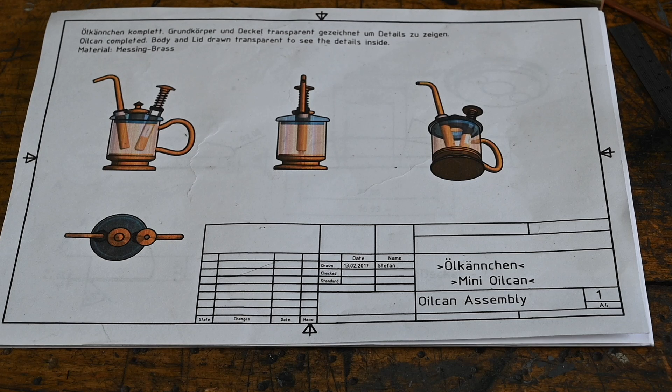Right, so I'm going to make this little mini oil can. I found these plans on the internet. I'm not going to do it exactly the same as that, but I got this bit of leftover brass from a steam engine project. I got another bit of brass rod. I got some copper pipe. I'm going to make a couple of springs, and that's about it.

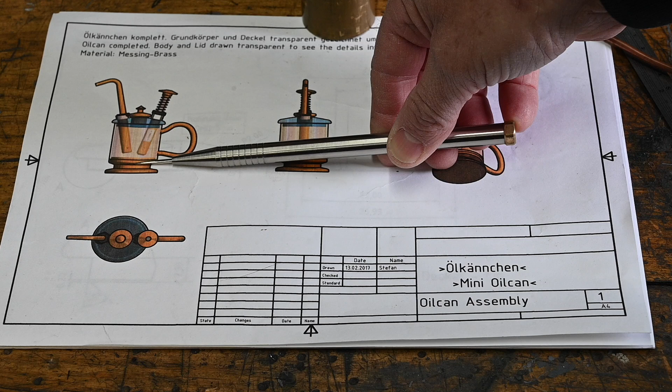It's fairly straightforward. The plans actually show this middle section. It's not transparent like this drawing. It's actually brass. They show this middle section made out of brass tube, and the bottom is separate and then silver soldered on, but I'm not going to do that. I'm going to do this all in one because I can't see the point in doing it in two if I've got a piece of brass big enough to do the whole lot. So anyway, let's get over to the lathe and get this turned down. Let's get that mounted in the chuck.

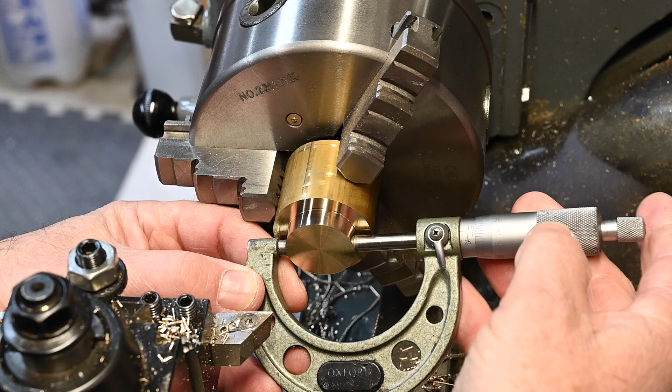Right, I've got to take my fixed tool post off and put the compound on. I've set the compound up. I'm just going to cut the angle on the front. Right, that's got the lead angle. Just going to put a little round on there.

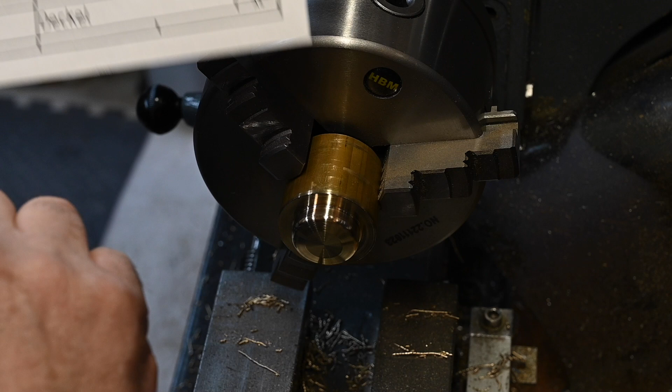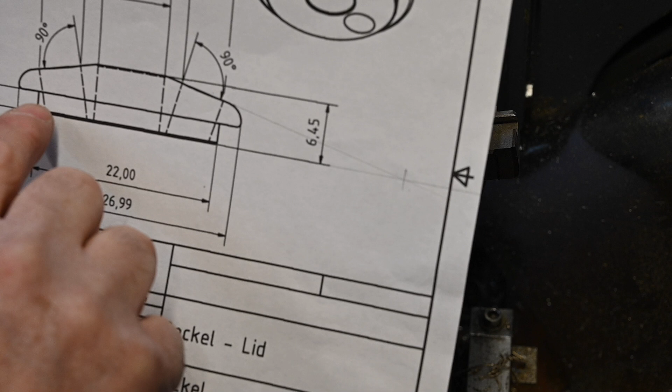Right, so I've got this little round here now, and this chamfer on there, down to the 8mm on the flat top. Well, I've actually gone 10mm because when I bore it out, I don't want that to be exactly to the edge of the chamfer. I want a little step there. That's just a change in design, nothing to worry about. Right, I'm now going to put a parting tool in and form this piece here, the little lip that then sits inside the top of the can.

Right, I'm just going to set the DRO. I'm touching off on the face with the parting tool. Set the DRO to 0. Come out. Move the cross slide 2.3mm, which is the thickness of the blade on the parting tool, and then re-zero the DRO. That now means that the edge of my parting tool is exactly right with the outside edge. So now overall I'm 10mm, or should be thereabouts, 8mm I think, yeah, 8mm. So now to cut that shoulder I've got to come back 4mm.

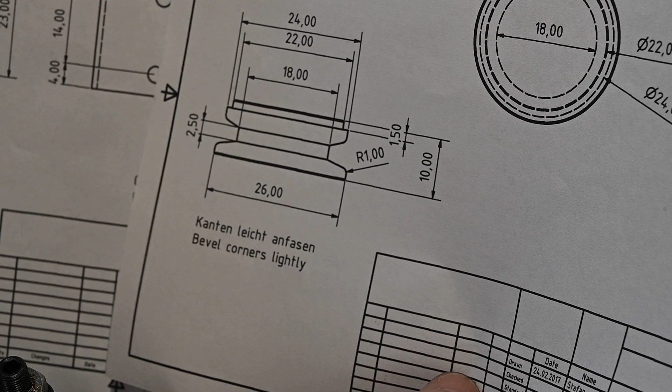Right, just got to drill a 5mm hole for the filler cap. I can now part that off. We've got so far. Right, now going to turn the base, which is this piece. It shows it separate, and then it shows just the little design on the bottom there. I'm going to do that all in one, so effectively that'll join onto that. So anyway, let's get it turned down to 24mm.

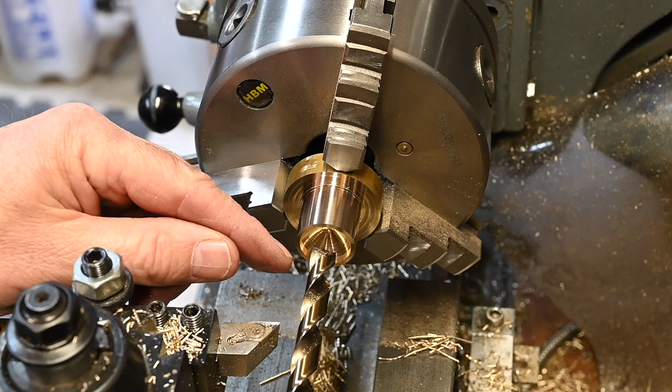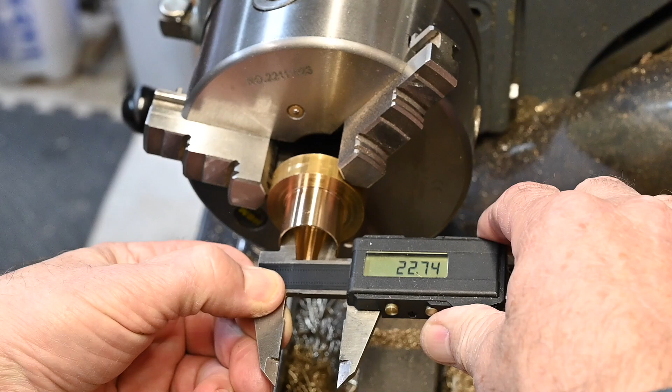Right, I'm going to drill out the centre to 20mm and then go in with a boring bar to finish it off. Now, because I've already got some drilled out there, I've got to just set the drill tip to the edge. So I'll just bring it down. One minute, bring it in a bit. Oops. Right, touch off on the scale, 0 my DRO. Perfect.

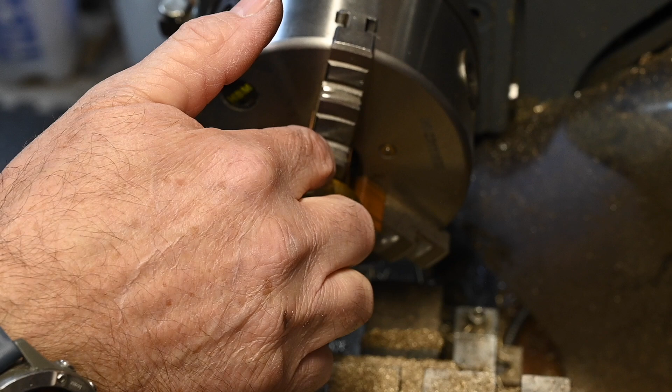Right, just got to flip it over now and turn the base down. Right, I've got it flipped round. I put some copper on the jaws, the soft jaws, and I haven't over tightened it, hopefully, because I don't want to distort the other side, but anyway, let's hope not.

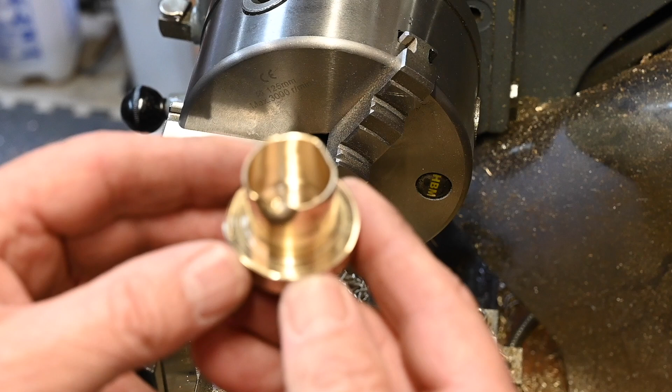Well, I got too greedy, and this is the result. So anyway, find another piece of scrap brass and start again. What I'm going to do this time is turn this end first, because that way I'll have something solid. Take the soft jaws out for a minute. Fortunately, I have got another offcut from the turret on the steam engine, so I'll be able to use this.

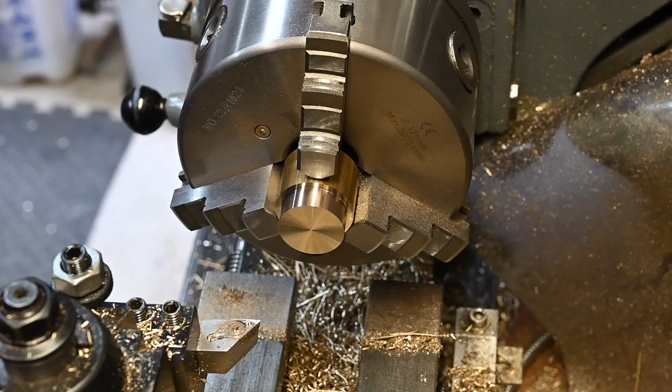So let's get this sorted out to start with. Let's get the tool square to the work. There we go. Right, I've now got the tool square to the work. I'm just going to eyeball that. Right, I've just eyeballed the centre of the tool. I'm now going to move it over 5mm and lock it off.

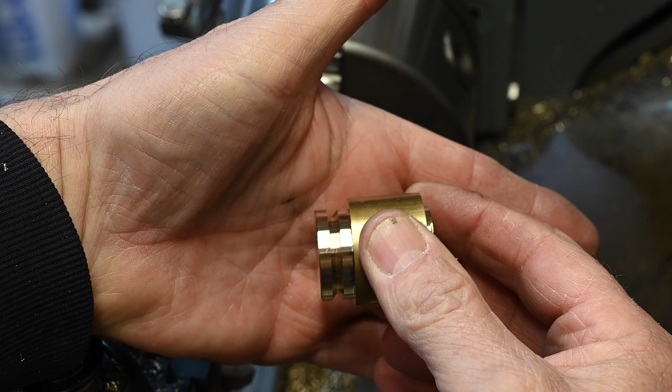Right, the drawing calls up for this shape, but I quite like the shape I've done. I'll take it out because I've finished that end now. I'll find the key. I quite like that shape. So I'm gonna leave it at that for the base. So now I'm gonna put it in the other way around, turn this down, hollow it out, same as I did the other one before I messed it up.

Right, that will go on. I don't want to force it, because I want it to be a tight fit. Right, good. I don't want to get that stuck on when that cools down. I mean, there's not a lot of heat in there, but I don't want to put the lid on and then it cools down and I can't get it off. So anyway, let's whip it out.

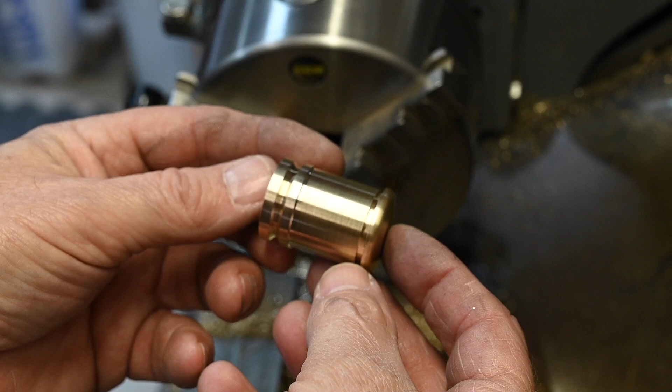Right, that's where we're at so far. Take two, of course. Yeah, starting to take shape. Right, the next part is to make the little finial, which I'm going to do now. So get a bit of brass set up and we can make a start on that.

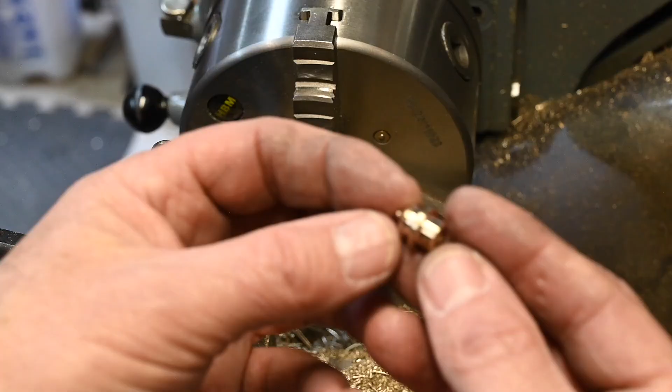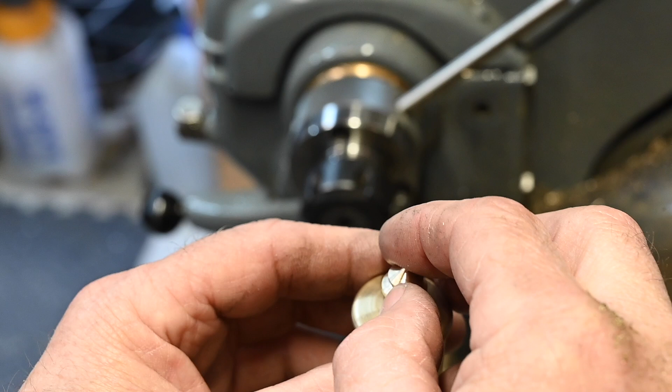Alright, I'm just going to put it in a collet just to tidy this point up. Little finial. That goes on the lid. Then you've just got to put an 8mm hole in there, and that's the little finial that you use to fill the oil can up with. Okay, so that little finial goes on there.

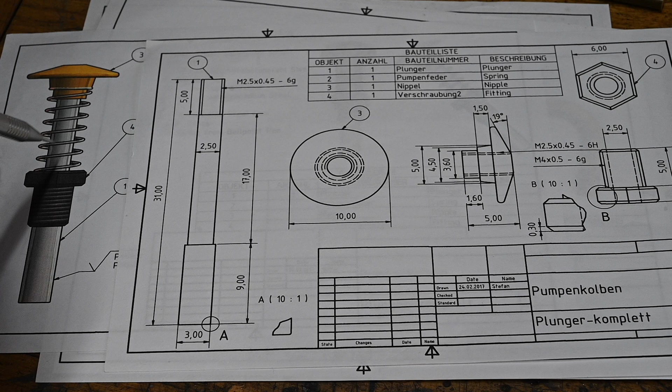Right, today we're going to make the plunger. Start off by making the top cap, and then we're going to make this retaining screw, and then we're going to turn down the shaft and make a spring for it. So let's get on with the little cap on the plunger first. It's only 10mm wide by 5mm deep.

I've got to do a 1.8mm hole in there and tap it for an 8BA. It's not going to be much of a thread because it only goes in 4mm. That's the hole drilled. Just got to get an 8BA tap now. I'm not sure what's happened there. 1.8 drill for an 8BA.

Alright, just had a bit of a cock up there. I got a bit worried there. I picked up the 6BA because I didn't read it properly, when it should be an 8BA. So anyway, we got the right tap now. I only want to put a little bit of pressure on this. Not going to get many threads in there. That's it, we're done.

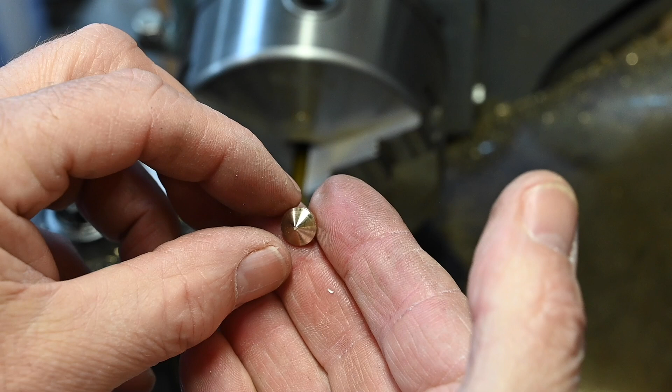Right, just need to get it parted off, but I got it parted off at an angle because it'll form the top of the cap, the top of the plunger. So I'm going to part it off with this little angle bit. Went off in completely the wrong direction. Right, that's the little cap for the plunger. Got a thread in there. Just got to clean that little pip off the top.

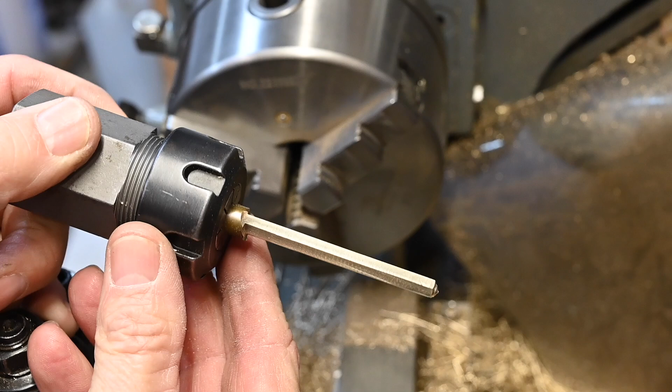Right, I just had to make a bit of 6mm hex stock. I didn't have any. The nearest I had was 8mm, and that was going to be far too big for this, so I just made a bit of 6mm. That's just for the fittings. Right, that's got to have an M4 thread, 5mm down, which is the size of the fitting. So I need to turn that down to 4mm.

Get an M4 tap on there now. Sorry, an M4 die to put a thread on. Alright, let's get that on there. I'm going to do a 2.4mm hole and then ream it to 2.5.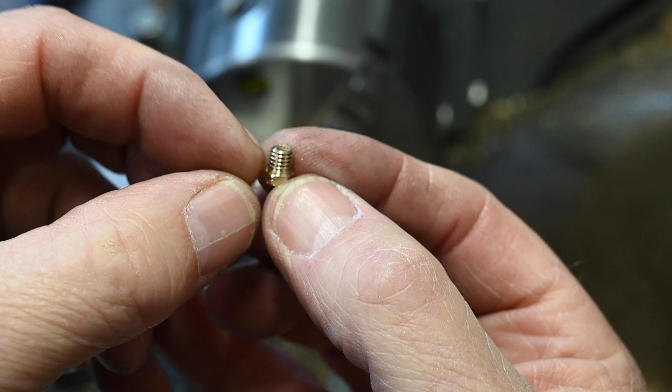Right, there it is. One fitting, which is, see, when you look at the drawings, it's not so bad, these fittings. You think, oh yeah, that's okay, no problem. And then when you make the fitting, it's a bit more of a big deal then. Anyway, we got that one done. We got another two of these to make.

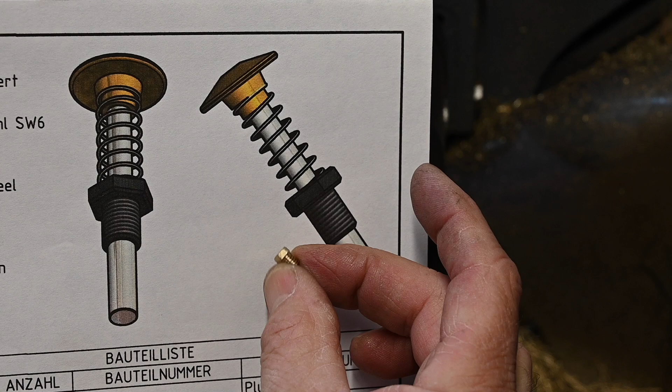I'm going to start to make the nozzle now, which means I need a bit of 3mm bar stock, so I'm going to turn this down to 3mm, but I also need a hole through the centre, so I'm going to get the holes done before I turn it down. I need a 1.5mm hole in one end, and I need a 1.3mm hole in the other end.

Right, that's a 25mm long hole with a 1.3mm drill bit. I'm now going to swap that over to the other end. The other end, it calls up for a 1.5mm drill bit. Right, we've got the hole all the way through now.

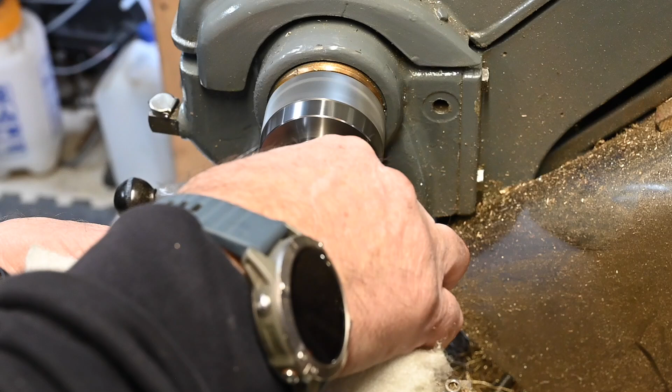Right, that's the 1.5 millimeter end. So I need to flip that over because I want the smaller end sticking out. What I'm going to do is just file this down, get the taper with the file. Just doing the bend, just heating it up, bending it a little, then heating it up again and bending it a little bit more.

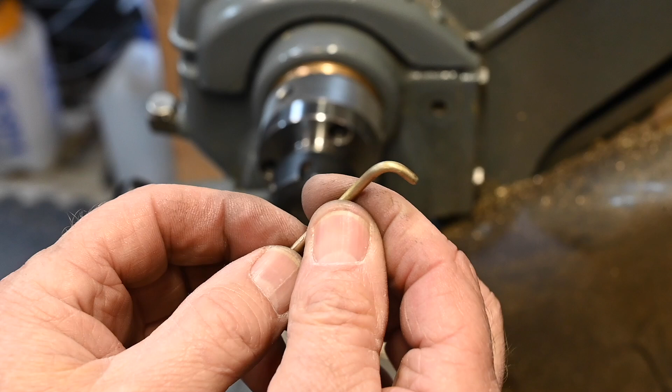Right, there's the nozzle. It's clear through. It sits at about that angle in the pot, which will give a nice little drip off the end, which is exactly how I want it. Just needs to be polished up, and that's ready to go in now. So that's another part done.

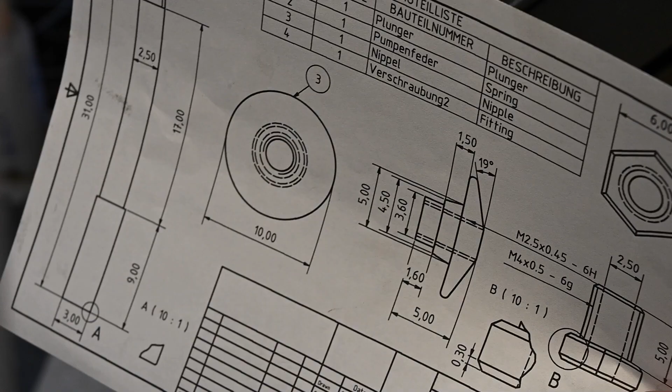Right, I'm going to make the plunger rod now, which is this piece. So it needs to be 31 millimeters long. It's 3 millimeters. I've got some ground stainless steel for that. That's actually this rod here. That's the plunger that goes inside the intake valve. So I've got to turn that down to 2.5 by 5 millimeters in.

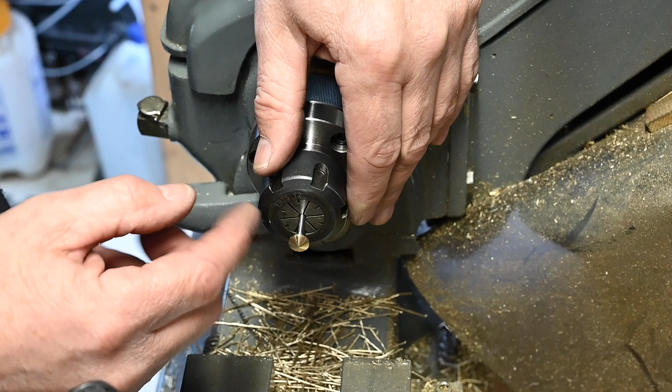Right, just put the thread on the end. I haven't got much thread in this plunger cap because the original drawing shows the thread all the way coming through and sticking out this side and then filing it off, but I didn't want that. I'm quite happy that the little bit of thread that's left in there, I've got about 3-4 millimeters of thread, so I've got enough to hold that on with a bit of Loctite to stop the spring from pushing the cap off.

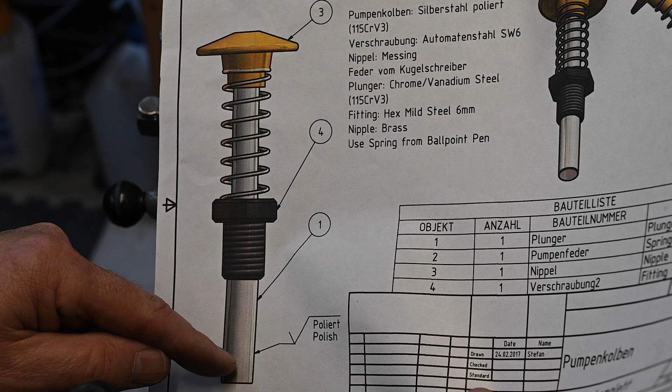The shaft down 17 millimeters down to 2.5 millimeters, and then the 3 millimeter will be the hole inside the valve. So this end is like the plunger and this bit is where the spring goes, but the 2.5 sits on the top of the plunger, like this. So the fitting will come down over the 2.5 piece up to the 3mm piece, and that's the actual plunger.

Got that piece down to 2.5mm. Lower the speed, and I think I'm going to engage the back gear as well. There we go. Nice and slow now. Drop of the good stuff.

Right, that's managed to break the cutter. Don't ask me why. I know it's silver steel, but it should have gone through there with no trouble, but anyway, doesn't matter. What I'll have to do now, I've got the line, I know where it is, so what I'll do is just take it out. Break that off actually. There we go. Pop it back in. And then just face it down to size.

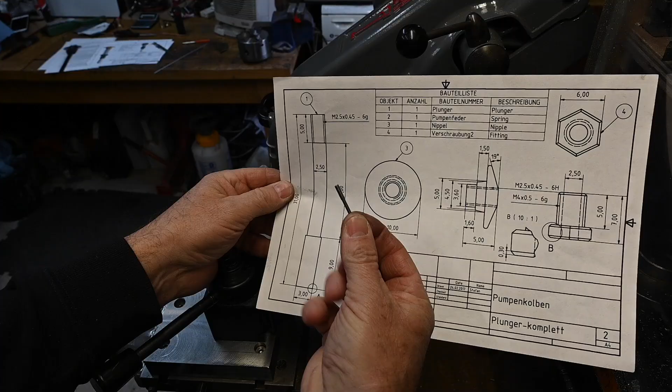The little plunger, which is that. So anyway, it's got the cap on the end. It's got the fitting to hold it in, and then there's a little spring. I'm going to make a little spring just to go in between.

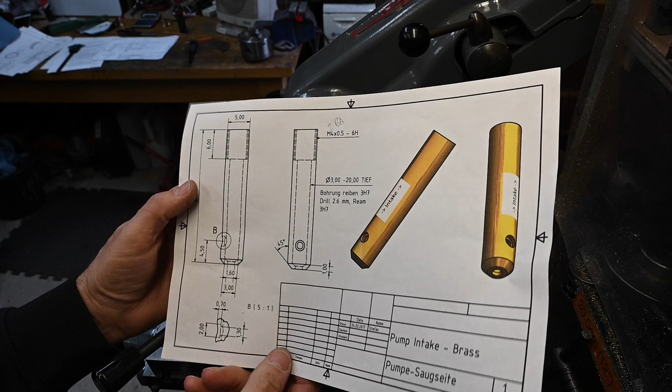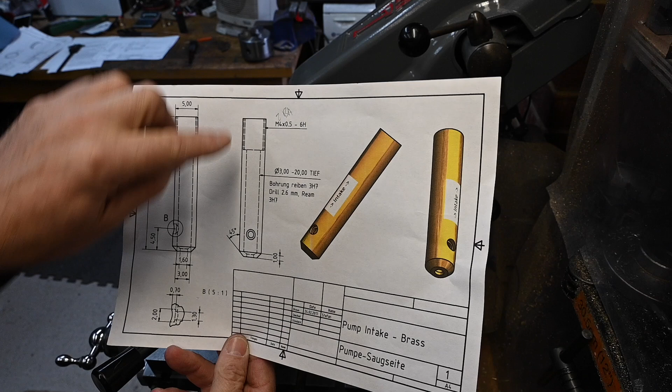Right, next we're going to make the pump intake, which is this piece of brass. It has got this hole in here because that joins the outlet. So anyway, we've got to make that. It's a piece of brass, 27mm long, and it's got a 3mm reamed hole through the centre for the plunger to go in. This is where the plunger goes in. It's got to have a threading there for the fitting that we made, and it's got to have these little holes in there where the ball bearings go.

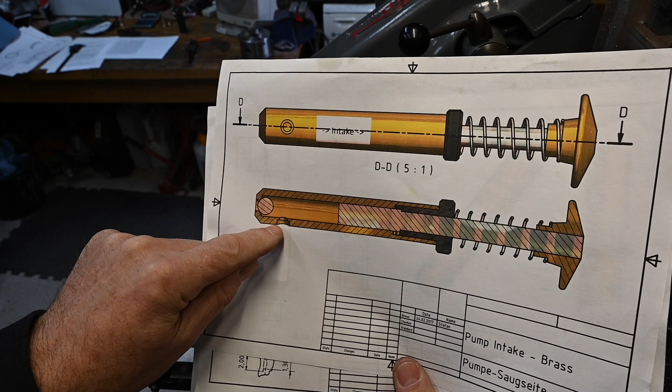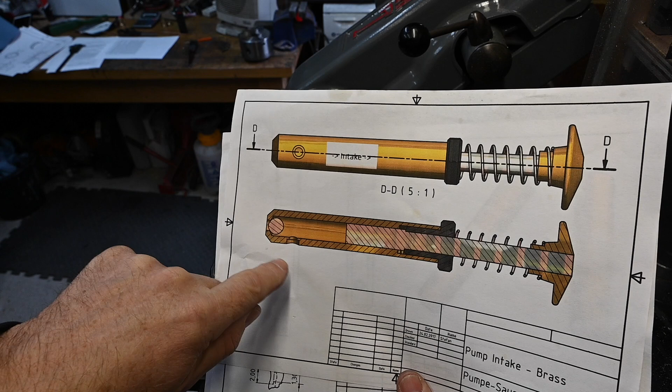Picture of where the bearing goes. This is the little hole which joins to the outlet, and then the ball bearing is there, and there's a spring goes in there. It hasn't shown the spring which holds that ball bearing against the hole, and then as you pull up it sucks it up, and as you push it down the bearing blocks the hole and forces the oil through there.

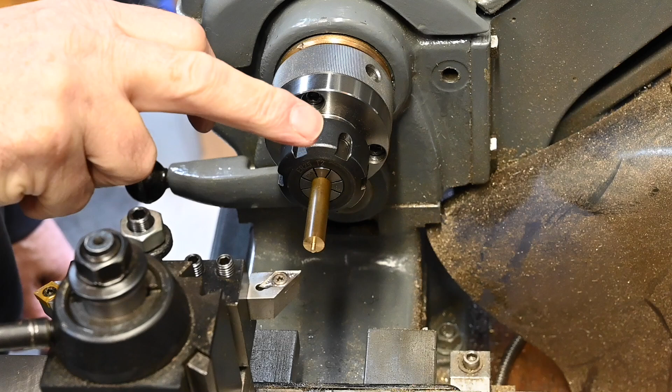Right, we've got a piece of brass in there now. We need to turn that down to 5mm, and put a hole in. Right, I've got to drill a 2.6mm hole now. Right, got to drill that down to 24mm. Right, I've now got to put a 3mm reamer in there and ream that out.

I'll just drill that out to 4mm and put a 2BA tap in there for the fitting. Right, we're just putting that little tap in the end there. Okay, that holds that in there, and then that slides up and down like that.

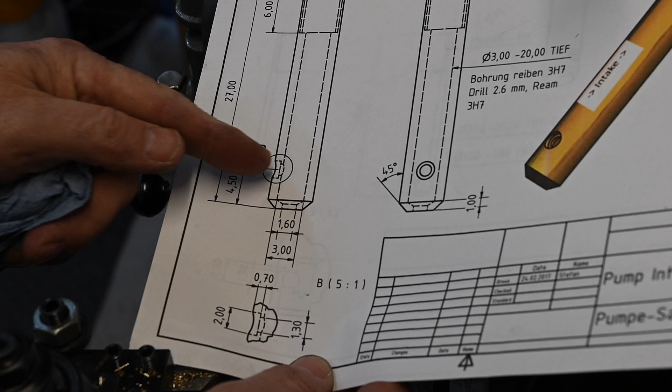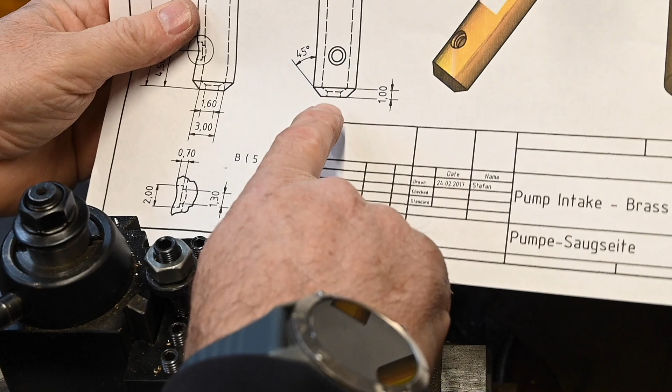Right, it's got that parted off. Now what I've got to do is put a 1.6mm hole just in the end. That's to draw the oil up.

Right, that's the little hole in the end. So now we've just got to put a hole in the side to connect this to the outlet.

Right, that's what we're going to make today. It's the outlet. The oil comes in through this hole here from the pump and is pushed up through there and out through the nozzle. So we've got to form this dotted line feature.

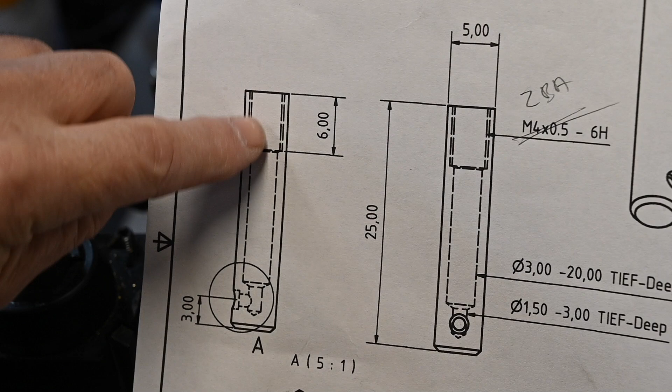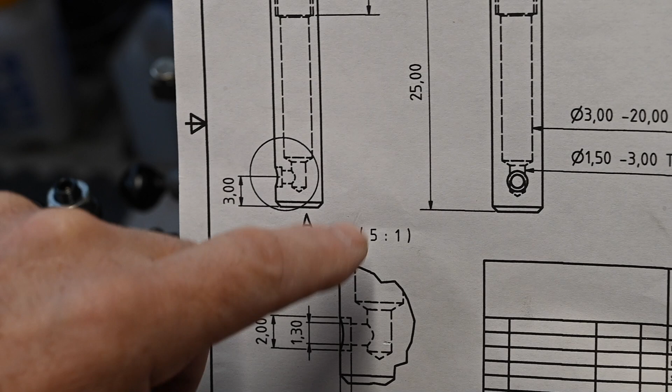We've got to form that inside 25mm by 5mm tube. These are the dimensions for that. This will change because I'm not using a 2mm joining tube. I've got a piece of 3mm, or I might turn a piece of 2mm down. But I'm going to get this made up and put in the cap, see how far apart they are, and see what I need to join them before I drill this final arrangement here.

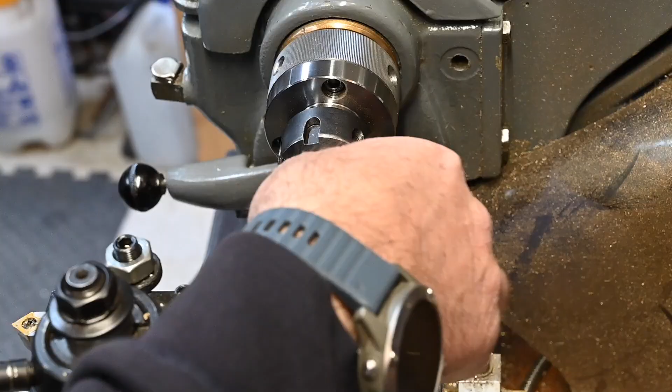Down to 5mm. So we've got 3 holes to put in. We've got a 3mm, a 1.5mm, and a 2BA, which is a 4mm. So we've got a 3mm hole to punch in there, 20mm deep.

Got a 1.5mm hole now. That's got to go 3mm more into it, so that's 23mm deep. Right, we've got a 4mm hole now, 6mm deep. That's for a 2BA tap.

Right, just going to put a 2BA tap in there now. That's for the little fitting. Perfect. Right, I'm going to part that off now at 25mm.

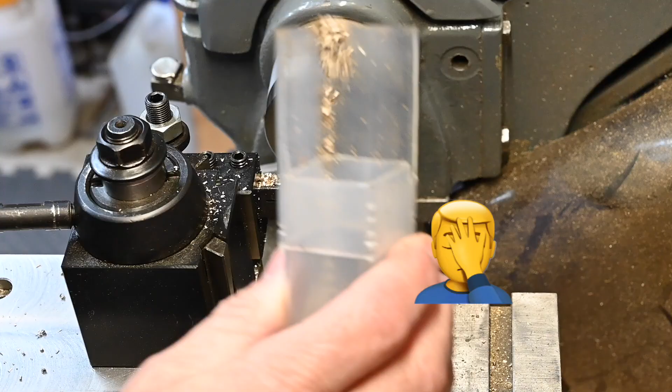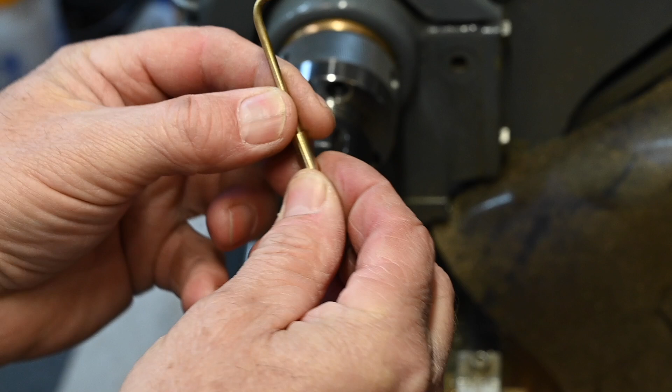Right, so that's the outlet that goes out to the nozzle. Obviously the nozzle goes through the fitting into there like that, and then that's the nozzle for the can. I might cut this nozzle down actually. I think that's a little bit big in proportion to the can, but I'll have a look at that later.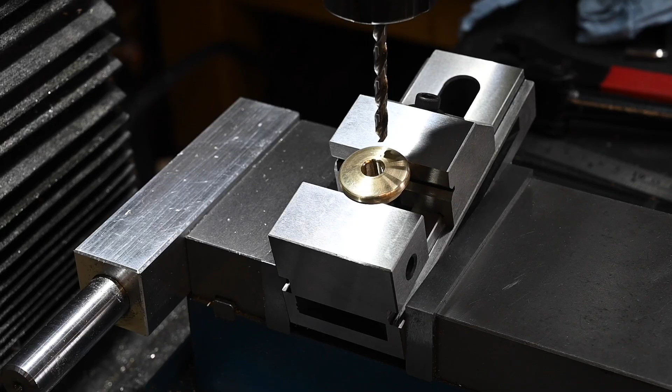So all we've got to do is just drill the holes in the side now, but I'm going to put these in the top first. Right, I've now got it set up so I can drill the hole, these 5mm holes through there, which take the two tubes, the inlet and the outlet of the oil can.

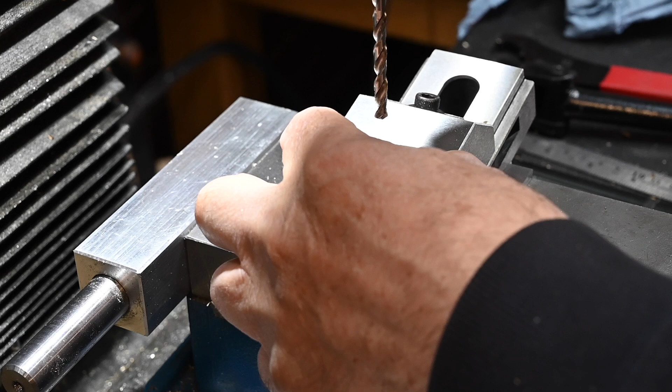Right, I should be able to turn this round now, 90 degrees, to drill a hole on the other side. I can now drill the other hole this side.

Right, I've set the cutter so it's 4.5mm in. I'm using a mill as opposed to a drill bit because it's on the round. And right, that's going to have a little bit of pipe soldered in there to join it to the other one.

So I'll do the same thing with the other one. Just to show you how I set it up, because it's actually smaller than the width of a parallel. So I'll set it up like that, put another parallel on the top like that, nip the vise up gently, I don't want to squash these, and then I pull that parallel out, give it just another squeeze, just enough to hold it in position now.

And now I can centre this one, which I believe is 3.5mm, in position, do the same things we did with the last one. In fact, I'm going to fine feed this one.

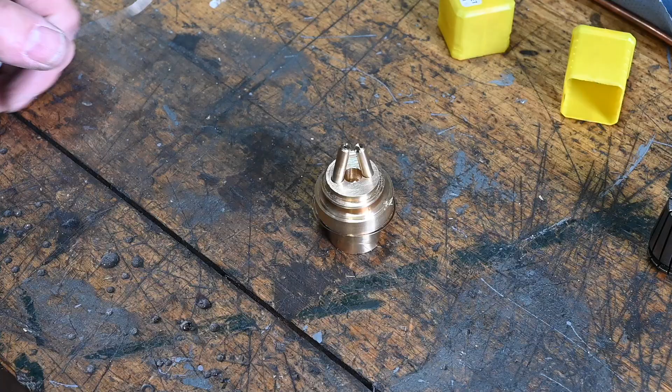Right, I'm going to soft solder these together now. Hopefully that will be okay for it. A bit of wood might be better. Do it on a piece of wood because that'll just act as a big heat sink, I think.

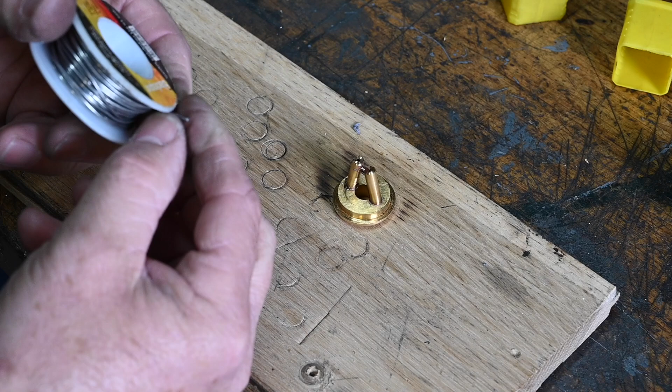Right, that appears to have gone okay. I didn't want to get too much solder around there, that's why I didn't silver solder this, because if I get too much running it's just going to block the tubes off. But I'll give that a little time just to cool down now. All I'm doing is just using some electrical solder, which is pre-fluxed, which makes it a lot easier for a little job like this.

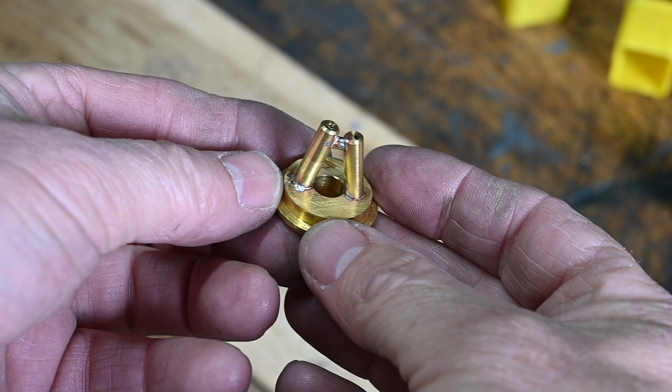Right, as you can see, that's all soldered together now, and I haven't got any run through on this side, which is exactly how I wanted it.

Right, we're ready now for the final assembly. This is the base, obviously. This is pretty much how it goes together. That's the intake, that fits onto there. That'll be Loctited on eventually. We've got the nozzle, which goes on that side.

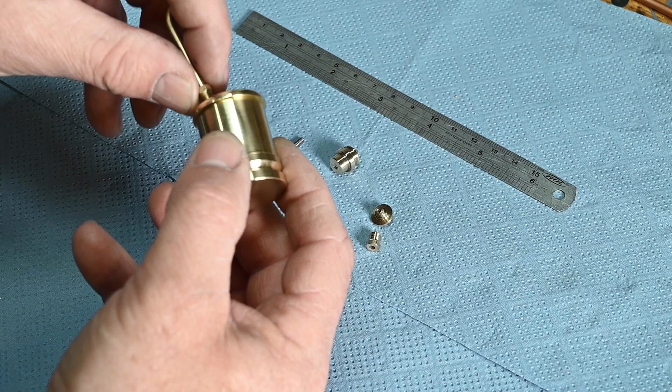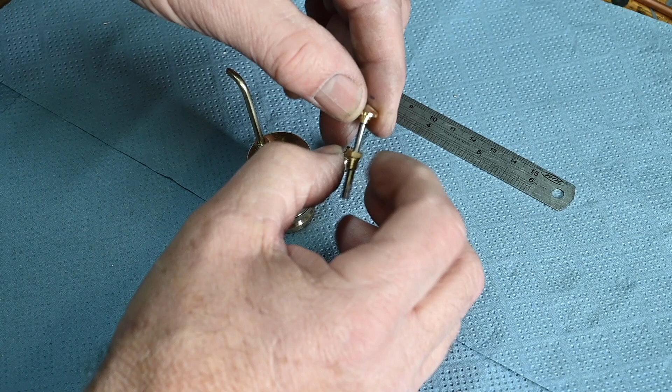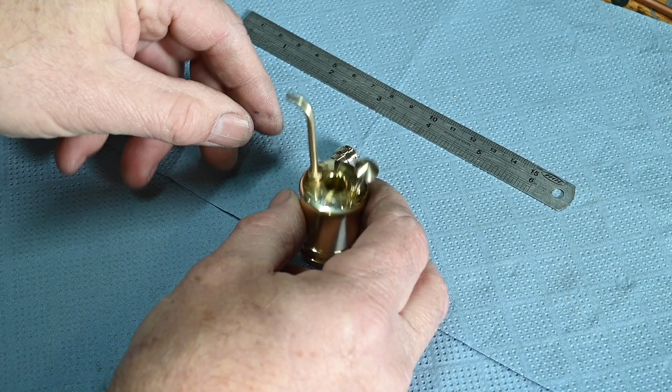That's the nozzle. And then we've got this little assembly, which is the plunger. That goes onto the plunger like that. That screws on there. There's normally a little spring in there which allows the plunger to move up and down. That fits into there, like so. And then the little cap, the little finial, goes on there like that.

And there you have it. One little oil can.